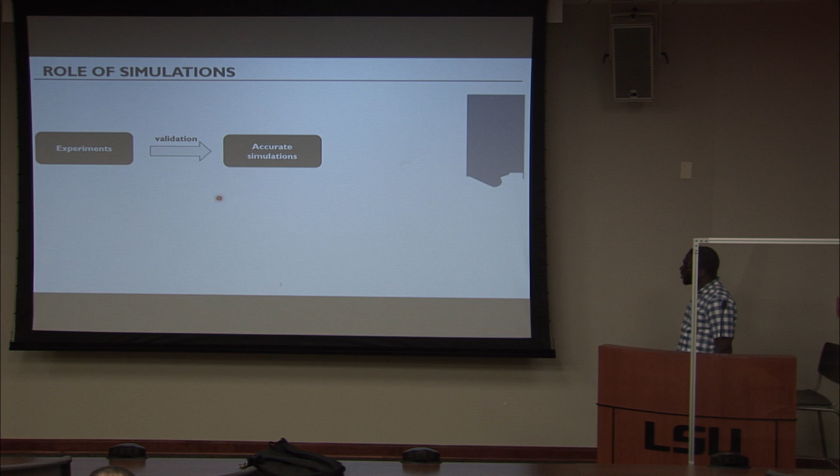So the idea is that we have experiments, and we have developed numerical models that we have validated against experiments.

Basically, what we want from the simulations is two things: we want simulations that are tractable, but we also want simulations that are predictive as well.

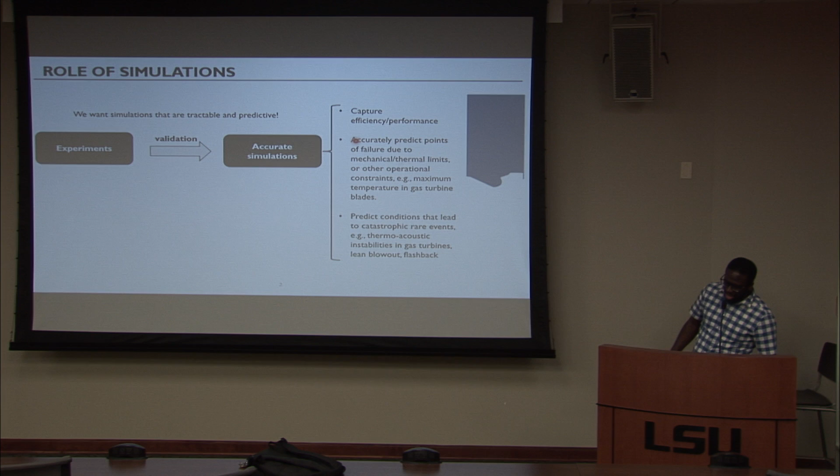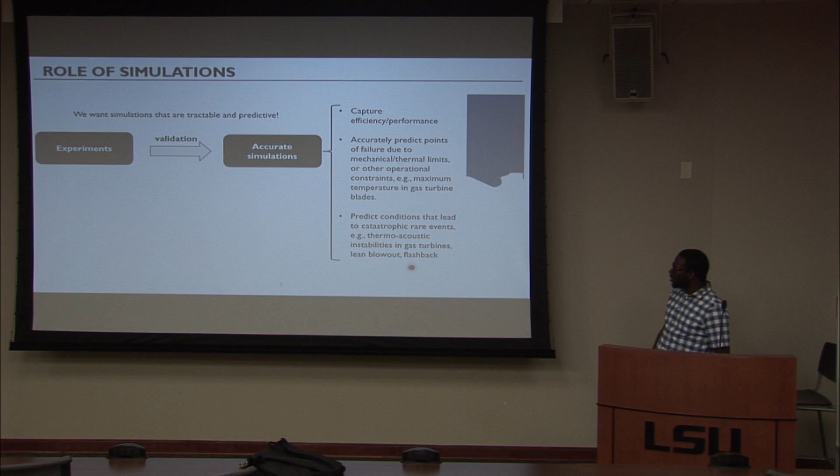What I mean by predictive is that oftentimes we want to capture efficiency or performance. We want to predict points of failure, or sometimes catastrophic events. For instance, I do a lot of work on CFD for energy applications like gas turbines and IC engines. In those systems, we're interested in thermoacoustic instabilities, lean blowout, flashback, knock, and things like that. So we want simulations that can capture all of these phenomena.

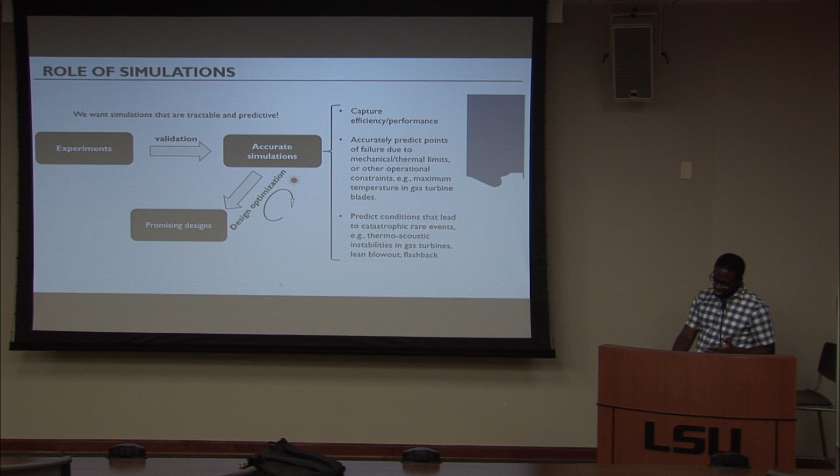Once we get simulations that are accurate and tractable, we can couple the simulation with a design optimizer. The design optimizer is going to run simulations at specific conditions, and progressively guide us to designs that are promising. Once we have that, we can go ahead and do validation by building physical prototypes.

So why do we want simulations? The first reason is because we can easily test our design in regions that are hard to test otherwise. For instance, with thermoacoustic instabilities, you might damage your engine, but if it's a simulation, it's possible to do that safely.

The other huge reason is that we can adjust parameters that are hard to vary in experiments. For instance, if you wanted to change geometry, you'd have to go build a new device, but with simulations you can change the geometry easily.

At the top here, I have a simulation of a heavy-duty diesel engine, and you can see the piston as it goes up. The red spot shows when you inject the fuel into the engine. These are the kind of applications I'm interested in: simulation-driven design optimization, specifically for combustion or energy devices where you burn a fuel to generate energy.

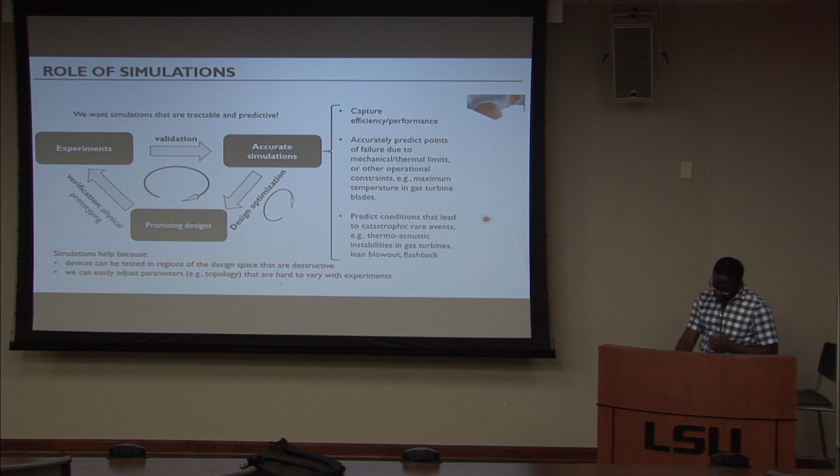I also wanted to talk about the process of design optimization, like in the previous slide. The idea is you have a simulation, you run it at different conditions, and when you get the results, you pass them to an optimizer. The optimizer, in return, gives you a new set of points to run, and you continue the cycle on and on like that.

The goal of the optimizer is to lead you to the lowest or highest point based on your design objective. Your design objective might be to increase the thrust of a jet engine, or to minimize fuel consumption. The optimizer is going to take steps and guide you in the right direction.

In terms of simulations, most of the types I run are called computational fluid dynamics, or CFD. The basic idea is that we're using numerical methods to solve the PDEs that govern the flow of a fluid. So what are some of the challenges we face? The first is that CFD simulations take a very long time to complete, even when using several processors in parallel.

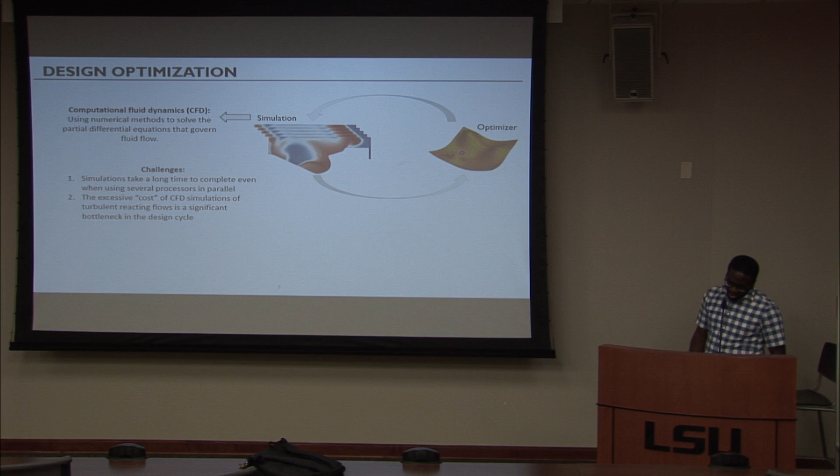Running CFD simulations, if you wanted to fully resolve all the scales, is going to take several months, or even in some cases several years. So it's just impossible to run. What that means is that usually the cost of CFD simulations is a huge bottleneck whenever you're trying to do simulation-driven design optimization.

And so what we have to do really is we have to use simplified models. We make assumptions, we simplify the models so that it can run fast enough. So that's basically what we do.

So what are some of the goals of my research group? We do research in two areas. The first one is to improve the accuracy of these reduced simulations or the simplified models. Or you can think about it as trying to make high fidelity simulations more practical. So we can think of that as working on the left side of that cycle.

But we'll also do some work on the side of optimization, which is how do we create design optimizers that are efficient with the way they use simulations. So what do I mean by that? You might have an optimizer that needs to run 100 simulations to get you a good design. But you could design an optimizer that's more efficient, that only requires 50 instead of 100 to get you a good design. So you can make progress on both sides of the cycle to reduce the overall time for that design cycle. That's the idea.

All right, a bit about the kinds of simulations that I run and why it's so challenging. This is what I like to call multi-physics, multi-scale, multi-species. First, the multi-physics - what does that mean? Well, it means that we have to capture multiple physical phenomena.

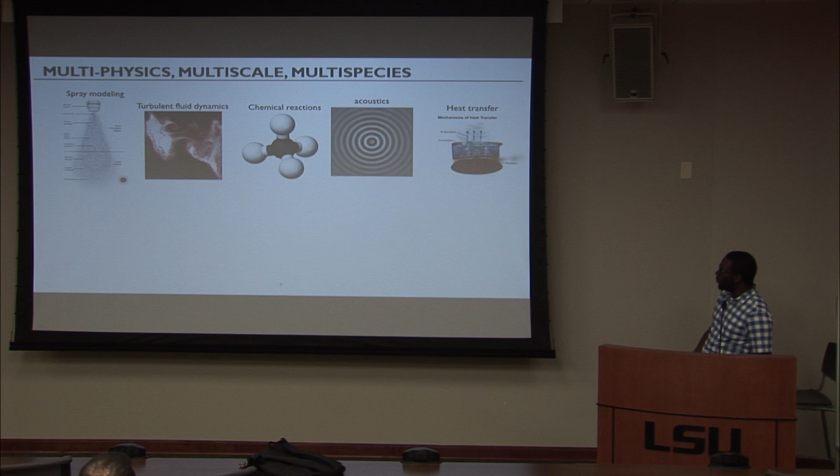You have to have a simulation that captures all of these effects. The problem isn't capturing these effects as much as it's the interactions between them. So you can have your spray that comes in and that can generate turbulence. Or you can have your heat transfer kind of affect the chemical reactions. Or you can have the interactions between chemistry and turbulence, which is a big deal, and it's really tough to capture. So that's the multi-physics part.

It's multi-scale because the range of time scales range from about a nanosecond to the order of seconds. You have to capture what's going on across those scales. You have a large range of scales in space as well. And then the last one is if you have chemical reactions, oftentimes you have several species you have to capture.

So if you have hydrogen and oxygen, we know that that should give us water. But you don't just get water from hydrogen and oxygen. You have several steps and minor species that get formed in the process, and you have to capture what's going on with all of them.

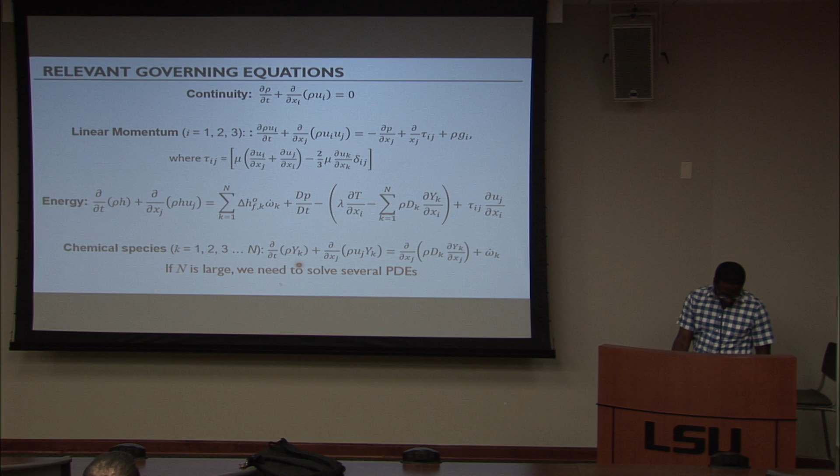All right, so I'll go a bit into the two sides of that coin that I mentioned. But before that, let me put things in context. The first part of the talk focuses on the left-hand side, and the second part focuses on what I have on the right, which is optimizers. I'm going to talk about some of the work we're doing in my group on trying to make these two sides more efficient.

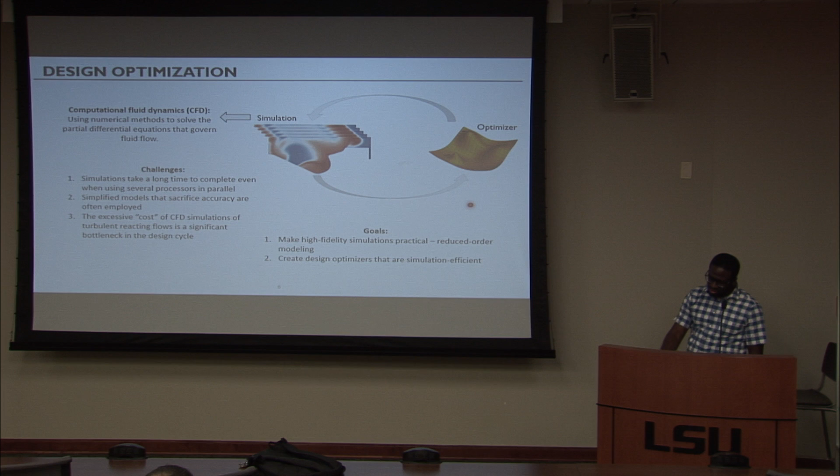So the first part, I'm going to talk about specialized neural networks for reduced order modeling of turbulent combustion. And I'd like to acknowledge my collaborators. This work was done while I was at Argonne as a postdoc before I joined LSU. I'd like to acknowledge Pinaki Pal, research scientist, Cody Nuno, who has now left, and Prithwish Kundu, who worked with me on this project.

So the basic idea of a neural network is I have an input, which I'm calling x here, an input vector. I'm trying to make a prediction for an output vector y. This is a supervised learning process. I have some hidden layers, weights w, and a bias vector, set of biases, b. The idea is that for each layer I apply a linear transformation and a nonlinear activation function, from the input layer all the way to the output layer. I have a loss function that measures the distance from my predicted value to my actual value that I'm trying to find.

I can use some sort of gradient descent algorithm to update the weights so that the predicted and actual values match. So that's the basic idea: it's a supervised learning process. I give my network examples, it learns from that, and in the future I try to use what it's learned to make future predictions.

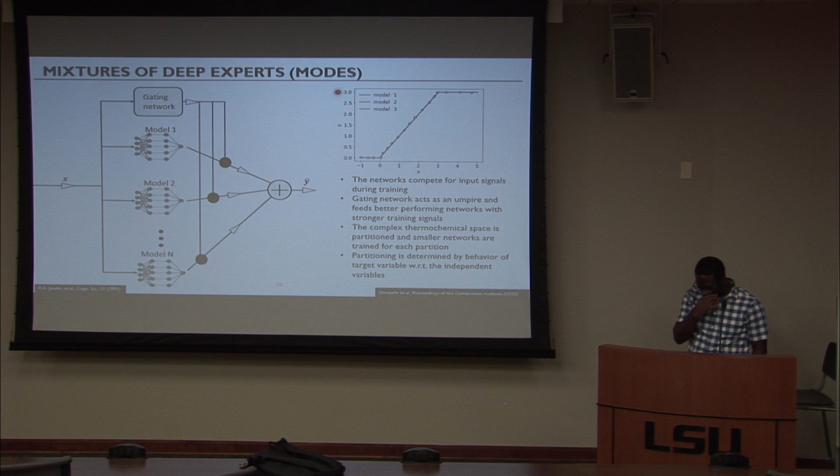So the loss function that we have is shown here, and this is a loss function for a given expert k within a system of n experts. E sub k is the error—the predicted minus the actual value you're trying to predict for that expert. Pk is the prior probability that an expert is the best, which is the probability the gate network gives us.

Beta is a parameter that tries to keep the experts separated even as the errors go down. The motivation behind this loss function is that if we differentiate it, the learning rate for updating the weights gets scaled by alpha sub k.

If e sub k is small relative to the rest of the experts, then alpha sub k is large, meaning that expert learns faster. The reverse is true: if e sub k is large, alpha sub k is small, and that slows down learning for that expert. So that's how they train.

In terms of the loss we use for the gate network itself, it's just the standard cross-entropy loss of classifiers.

So now comes the application. That's the idea behind mixture of experts itself. For the application, what we've chosen here is something called the Flamelet model, which is widely used in combustion modeling, turbulent combustion modeling.

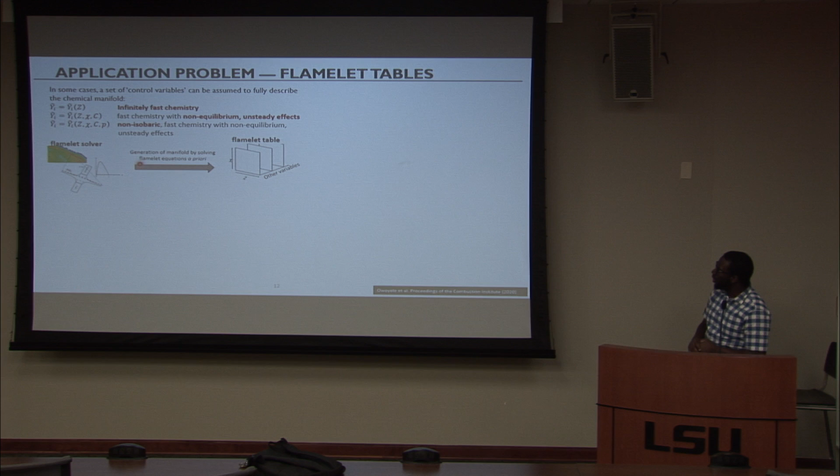The way this is solved is you run a very simple case, then take the result and store it in a table. So it's a tabulated model, and we try to store that table in memory so that when we run the CFD, we don't have to solve the chemical species in real time. All we have to do is look up the table, interpolate, and pick out the result. That saves a lot of time.

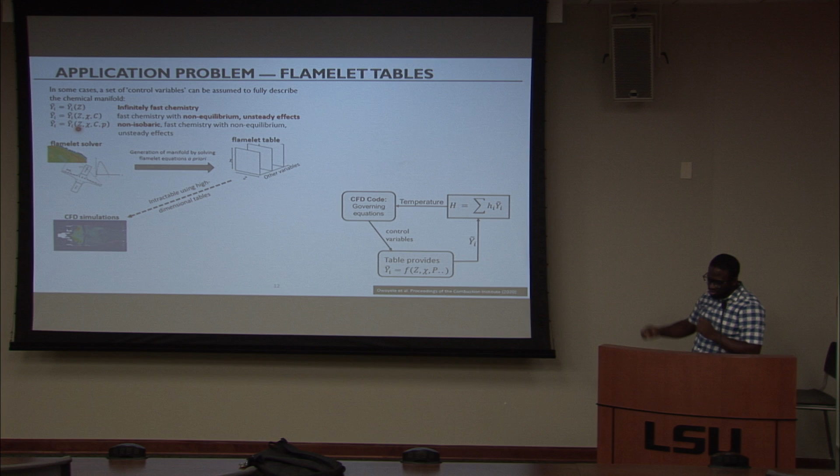The problem is that storing a table is intractable if this vector is high dimensional. So with one or two variables it's fine to make a table, but as you increase the number of control variables or dimensions, it becomes intractable because of the memory demands. As you go from one to six dimensions, the size of your table basically increases exponentially.

So the idea is to apply mixture of experts here—instead of taking the table and storing it in memory to predict the mass fractions, we're going to learn that table using a neural network, using a mixture of deep experts, so that we can make predictions in CFD as opposed to relying on the tabulation approach. That's the application here.

The good thing is that for the neural network, we only need to store the model parameters. We don't have to store anything else.

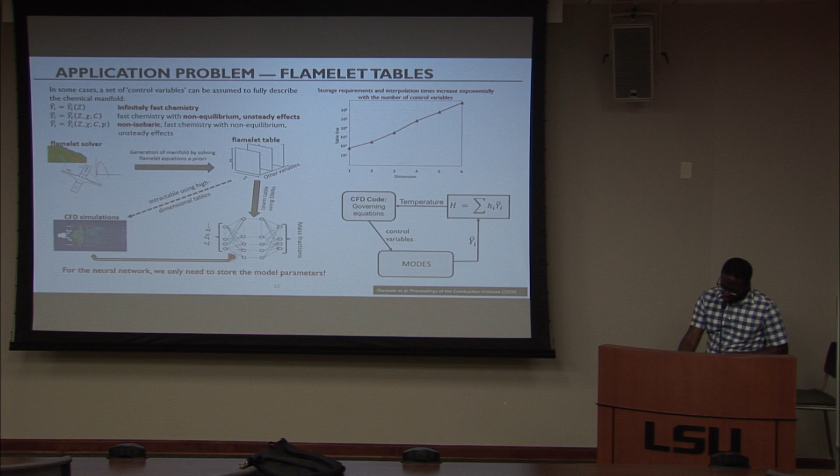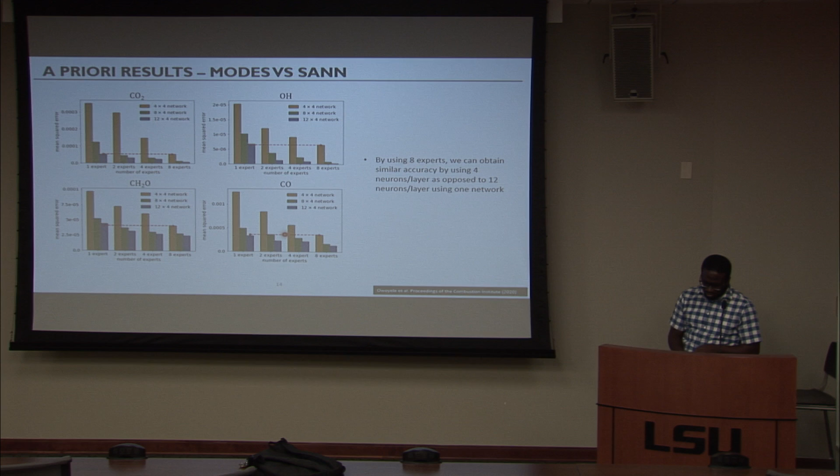We also did something else. The last result I showed was for a 4D table with 4 variables. Here we tried to extend it to 5 control variables. The table had 50 million entries, or 29 gigabytes, which might begin to introduce storage issues in CFD. In contrast, the neural network was about 1 megabyte, and again we see that using the specialized neural networks works a lot better than trying to fit everything with one.

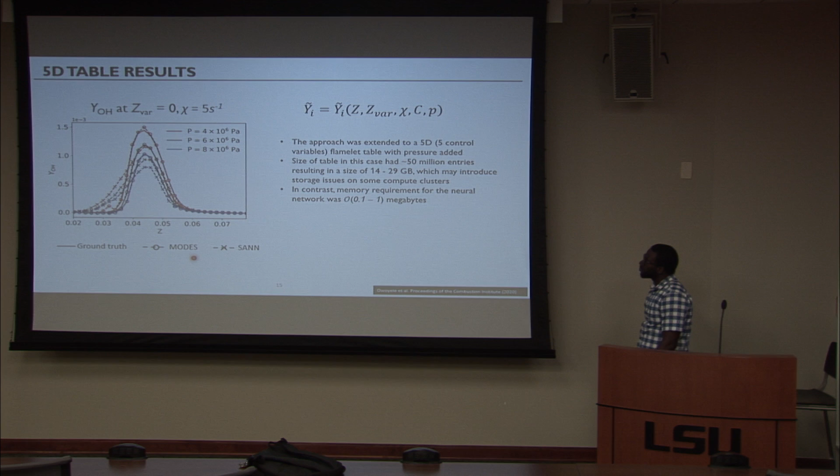We did an actual 3D CFD simulation. These are the details of the setup, called a spray A simulation, relevant to diesel engine conditions. You have a spray that comes through a nozzle, spray breakup, the fuel atomizes and evaporates, and mixing between the fuel droplets and the air.

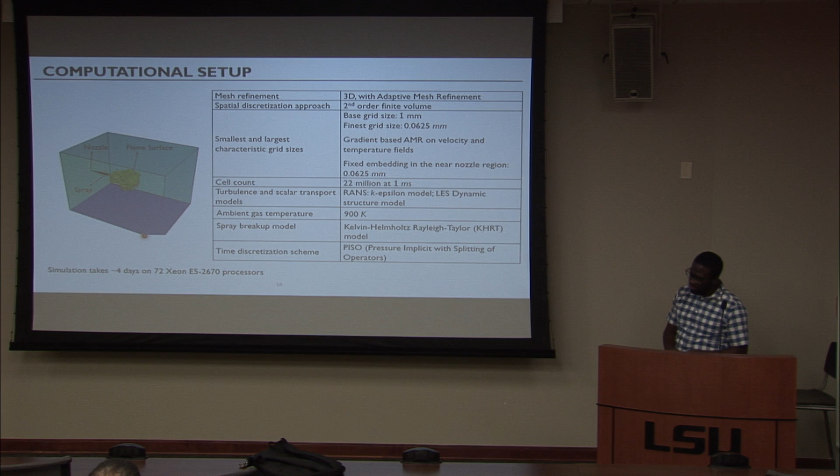Ultimately you have a flame that develops due to that. These are the details of the cell counts, 22 million at 1 millisecond. We use the RANS model, and we also did some LES, which is what I'm going to show. The temperature of the gas around was about 900 Kelvin, and the simulation took about 4 days using 72 processors.

In this result, there's a blue line forming due to the spray. You can see the temperature on the right and OH on the left. OH really comes up when the temperature goes high, because it's related to high temperature chemistry. Let me run that again — you can see mixing occurring, and at some point the temperature begins to rise. The temperature, OH radicals, and everything here is predicted by the neural networks.

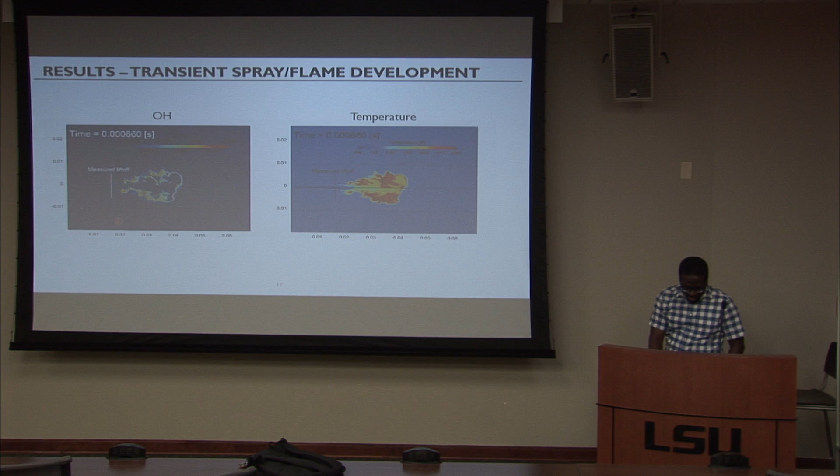We also have results here for ignition delay, which is the time that elapses between when you inject the fuel and when the flame develops. You can see that the MODES approach is really close to experiments — there's a slight error, but it's not too high. I also have a plot of maximum temperature, which it predicts well, and at the bottom, the rate of heat release, which is also well predicted.

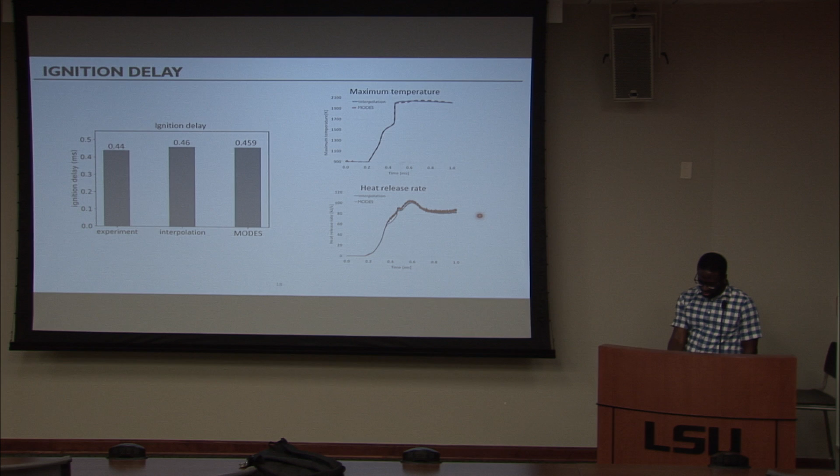The last thing I wanted to mention is that the approach does partition your input space, and it turns out the partitions it gets are actually physically intuitive. We ran a test with some data points: on the y-axis, the progress variable, and on the x-axis, something called scalar dissipation rate. Based on these two quantities, someone working in the field can tell what should be the pre-ignition zones at the bottom.

So you have a reacting fluid, but the reaction hasn't occurred yet. Then what you'd have is what occurs when it's actually ignited, in the process of igniting, and at the top is what happens when ignition has already occurred, so your combustion product.

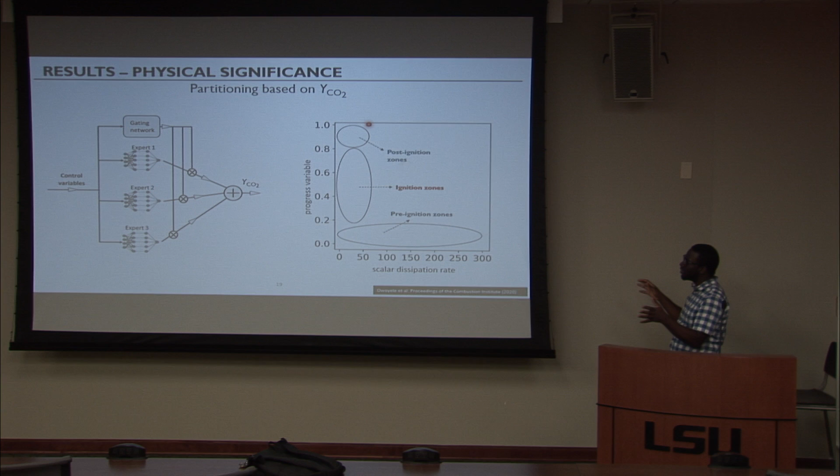We decided to run this problem and see what kind of partition we'd get, and whether the space division is actually intuitive physically. This is what we get: the model divides the space in a way that makes sense physically. The pre-ignition zones are assigned to expert 3, ignition zones to expert 2, and post-ignition zones to expert 1. This was interesting — it's not random, but makes physical sense. If I hadn't known anything about this problem, this would have been a way to understand better what's going on.

All right, so to summarize the first part of my talk, I presented a mixture of experts approach for developing specialized neural networks. I would say that even though this was applied to turbulent combustion problems, this is something that can be applied to a range of problems, as long as the function you're trying to approximate is complex enough.

We show that it led to better representations and accuracy compared to using a single neural network. And we also show that the global characteristics, like the ignition delay, was well predicted. And then in the last slide, I show that the partitions that we get are actually physically intuitive.

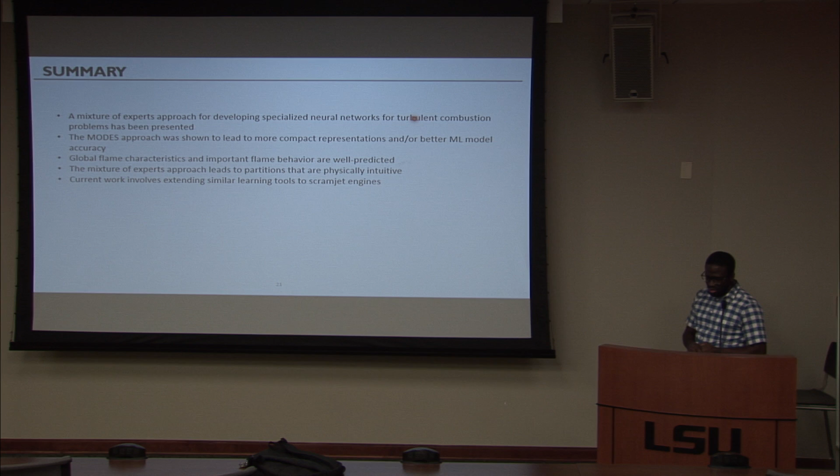And right now, we're trying to extend this to scramjet engines to see how this performs for those kind of applications. Lastly, I want to acknowledge the resources that we use and funding from DOE's office when I was in Argonne. We used clusters called Blues and Bebop at Argonne National Lab.

All right, so that's the first part of the talk. The second part, I'd like to talk about the second side. So we want to get simulations that are practical and fast, but we also need to get optimizers that are more efficient in finding out the best design that can take those simulations and use them to figure out the best design that we can get.

So for this work, I would like to acknowledge my student, my PhD student, who is right here, who has done a lot of good work and worked hard on this project. And a lot of what I'm going to be showing today is really his work and what he's done. And so I'd like to acknowledge him for that.

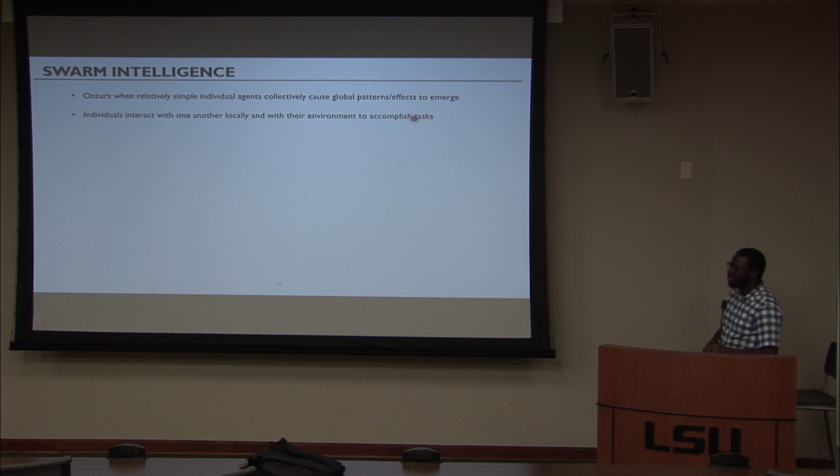So I'd like to first start by talking about the idea of swarm intelligence, because it really fits into what we're trying to do here. So the idea behind swarm intelligence is that it occurs when you have an individual agent that's simple all by itself, but it can work with other agents to cause global effects to emerge. The idea is that it interacts with its environment and with other agents to accomplish tasks that by itself is impossible to accomplish.

So think about a single insect, for instance, like an ant, right? It can't really do much, right? It can maybe lift a few things, but what happens is that when they work together, they're able to accomplish complex tasks. And that's the big picture of swarm intelligence.

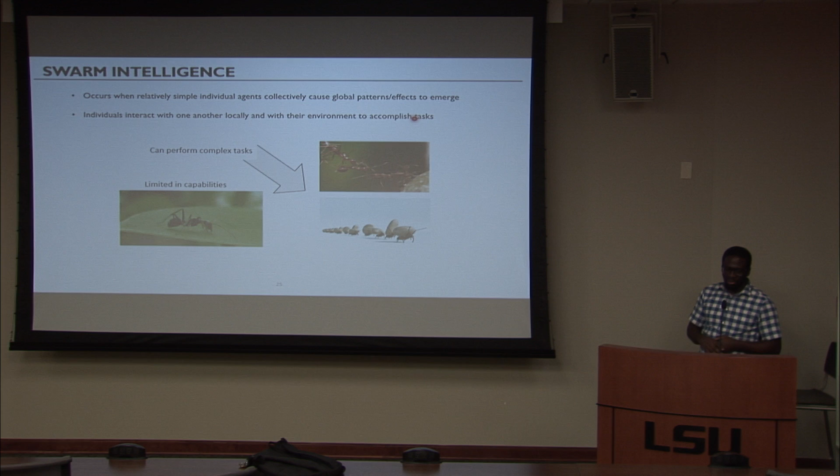So, well, we can sort of think about other examples. So first, I mentioned ants, right? So we know that ants usually, when they're trying to forage and look for food, they'll actually work together and collectively choose the shortest path together. We have wasps and termites that build nests and mounds. So this is an example of a mound. And they can get pretty tall, several feet tall actually. It's impossible for one of them to do this by itself, but they can work together and do this collectively.

We have flocking in birds and fish, and also bees as well. When they're looking for a new home, they would often scout and look around and try and select the best location that they can find.

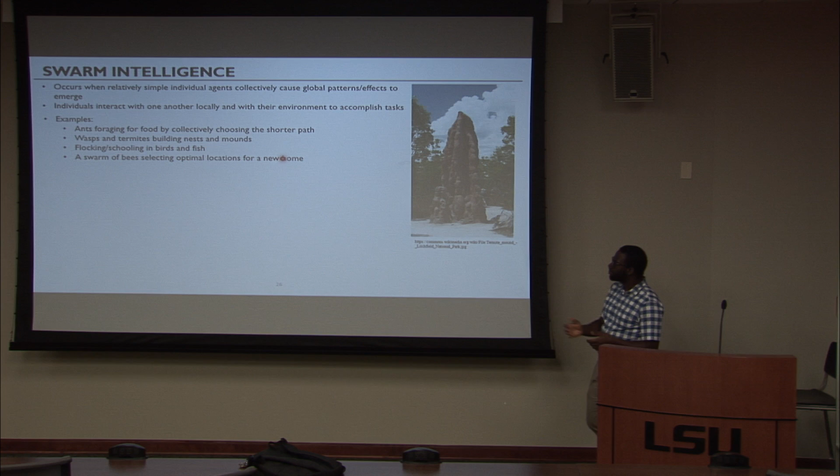So what does all of this have to do with what we're talking about, optimization? The idea is that we can do something similar. We can have this swarm of agents that cooperatively work together and try to find the maximum point or the minimum point on a surface, right?

So in this case, I have a function. You can sort of think of this function as having a variable x and y, or x1 and x2, and the height is the objective we're trying to achieve. So we're trying to maximize the height on that, right? And so the question is, how can we put a swarm or some agents on that surface and work together to find the maximum point?

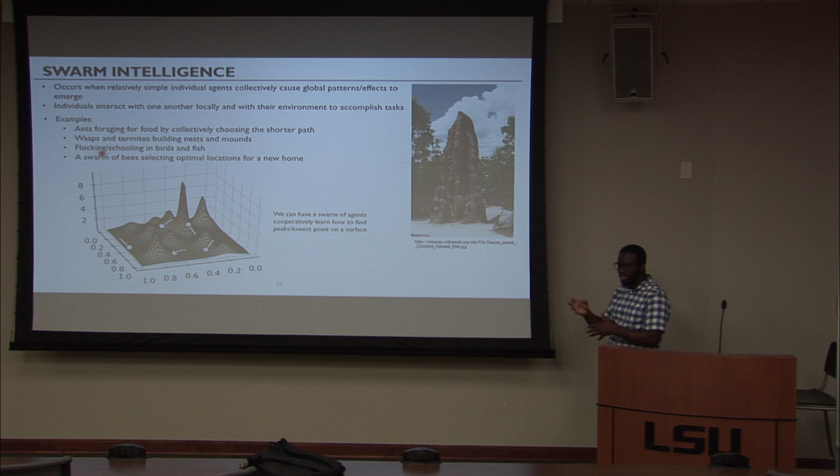So in line with that, I would like to introduce what we call DeepHive. And it's an approach that we've developed in my research group. And the goal of DeepHive really is to develop optimization policies using reinforcement learning.

The idea behind reinforcement learning is that you have an agent that's within an environment. The agent can take actions within that environment, and whenever it takes an action, two things happen. First is it gets an updated state. So the initial state was state s sub t at time t, but now the new state is s sub t plus 1. So it gets an updated state, but it also gets a reward for the quality of the action that it took. So the idea is that if it takes an action that's good, then it's going to get a good reward. But if it takes an action that's not good, we're going to punish it.

And so you can sort of think of the first part of my talk as focusing on learning by examples.

In reinforcement learning, we try to learn from experience. If you think about it, that's how we learn, right? The first time you taste a candy as a kid, it tastes sweet, and so you want to try it again because you get a positive reward. If you touch a live wire, you're going to get electrocuted, and you'll know not to do that again. So that's sort of the idea.

So the idea is, in summary, you try to learn to perform the best actions within an environment by trying to maximize reward. So that's what we're trying to do here. The goal of DeepHive, like I said, we're trying to discover optimization policies.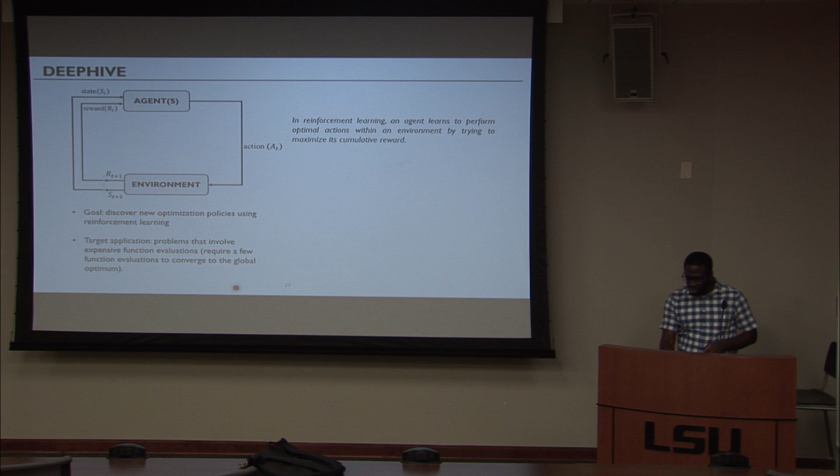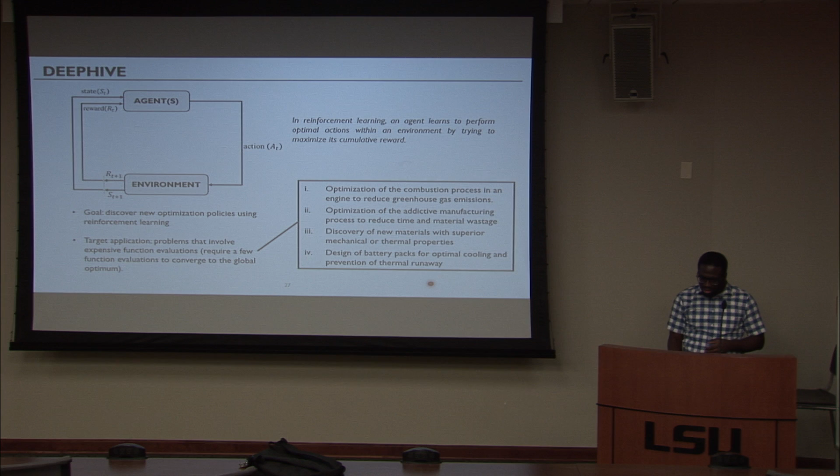The kind of applications that we're interested in really is the applications where the function evaluation is expensive. What do I mean by that? Think of trying to optimize combustion process to reduce emissions, or trying to discover new materials, or trying to design a battery power pack to optimize cooling. In all of these cases, anytime you have to go and take a step and do an experiment or run a simulation, it takes a long time.

So that's what I mean by it's expensive. Expensive might mean that it takes a while to do it. It might mean that the simulation takes a long time. It might mean that it costs a lot of money. The idea is that we don't want to run a lot of these simulations. We don't want to have to evaluate the model a lot of times. That's the idea.

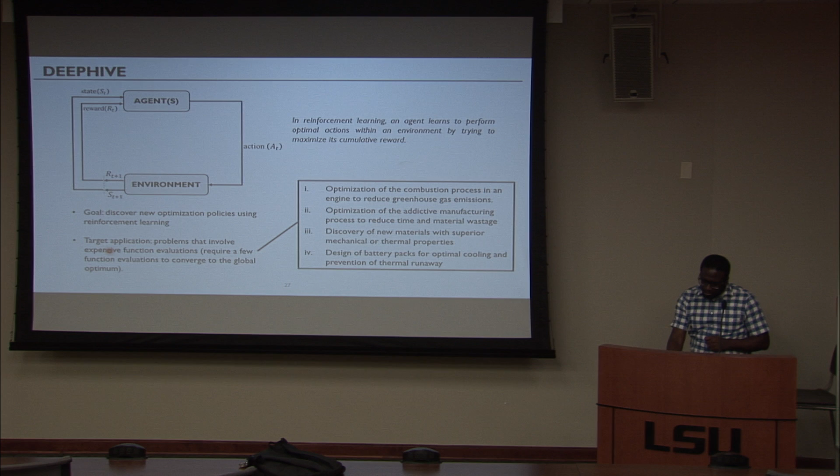So on this slide, I'll talk a bit about the connection between elements of reinforcement learning and DeepHive. At the top, I'm going to have key elements of reinforcement learning, and at the bottom, I'll have how those relate to what DeepHive is trying to do. First, in reinforcement learning, a key element is the environment. In this case, the environment is simply the function that we have that we're trying to optimize. That's the environment. That is where the agent lives and where it can take actions.

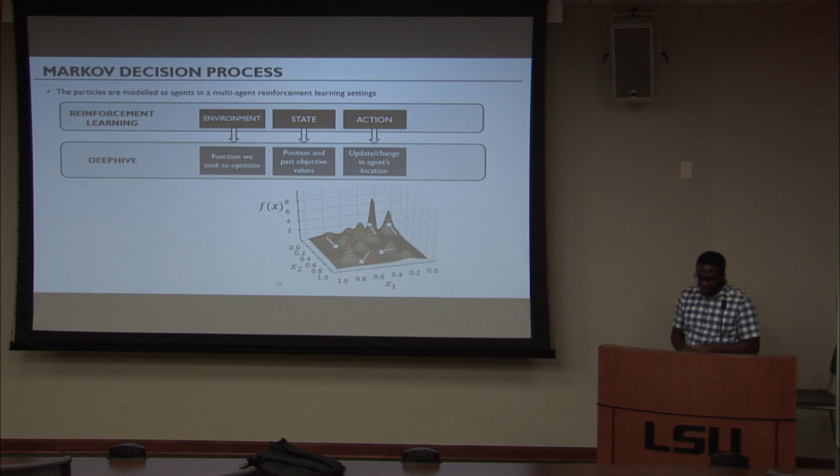The state is simply the position and past objective values of all of these agents, right? I have the agents sort of in the white circles, and that's the current state of the system. I can take actions within that environment, and to take an action simply means — you can sort of see the red arrows there. It means that I can update the position or location of these agents.

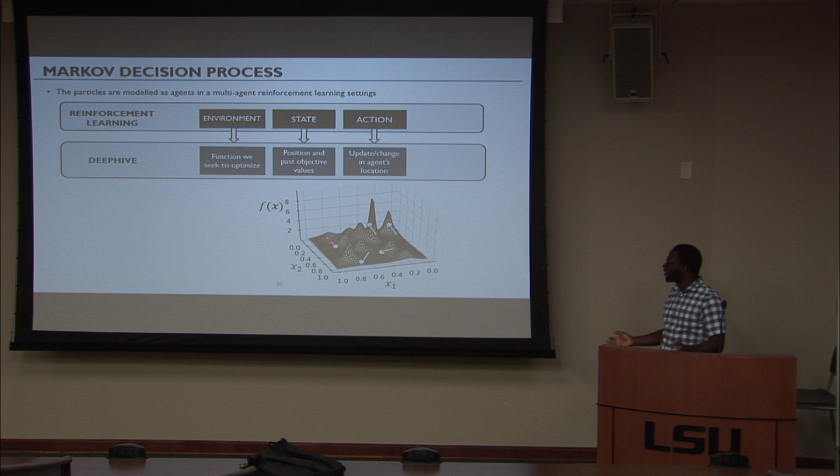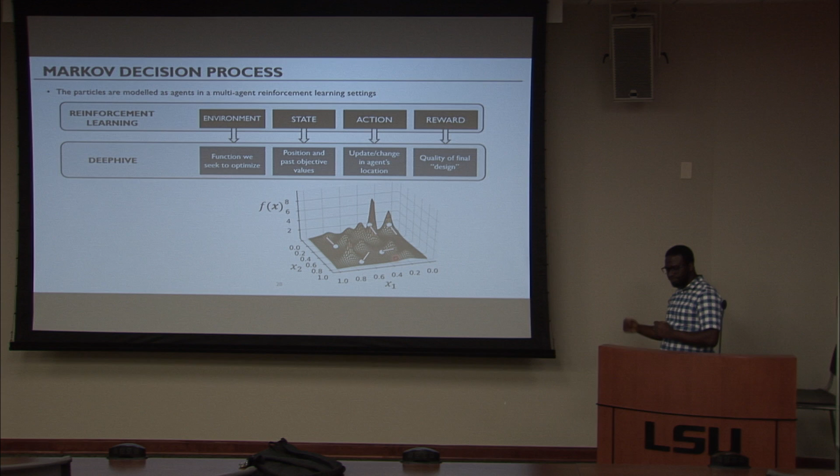So I've taken an action, and whenever I take an action, I'll see how good it is. Did I get a better objective, or did I get a worse objective? And so we are going to reward these agents, based on the quality of the design that it finds. A policy that doesn't find a good location is going to be penalized, and a policy that finds a good location is going to be encouraged in the future. So that's the idea: encourage good actions, discourage bad actions. We want to decrease the probability of taking bad actions.

So we have two stages here. The first one is we're going to take a bunch of agents that know nothing, and we're going to try and train them to learn how to optimize. That is called the policy generation phase. What we're going to do first is select an optimization problem, some sort of function, and we're going to set up the reinforcement learning environment — set up the state, actions, rewards, all that stuff. And then we train the agents using something called a PPO algorithm, which I'm going to talk about in a bit. Once we're done training, we're going to get something called a policy.

It's a strategy for updating the location of the agents. And what we want to do is save the best policy that we can find.

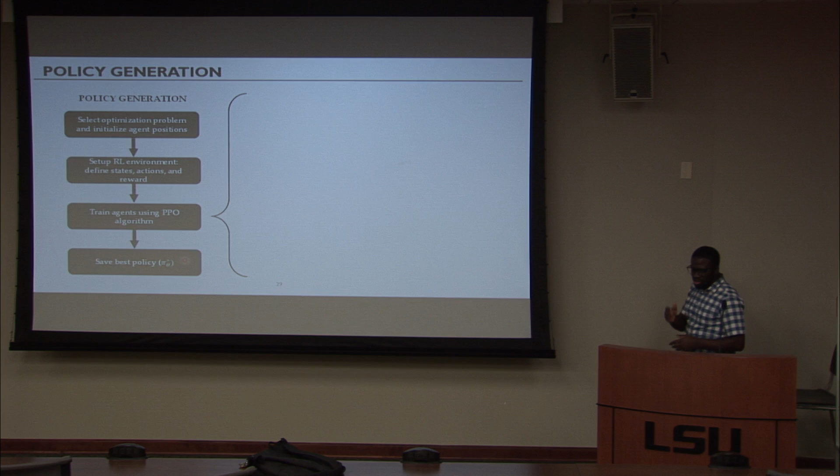If A sub t is negative, that means that action is going to be discouraged in the future. If it's positive, it's going to be encouraged.

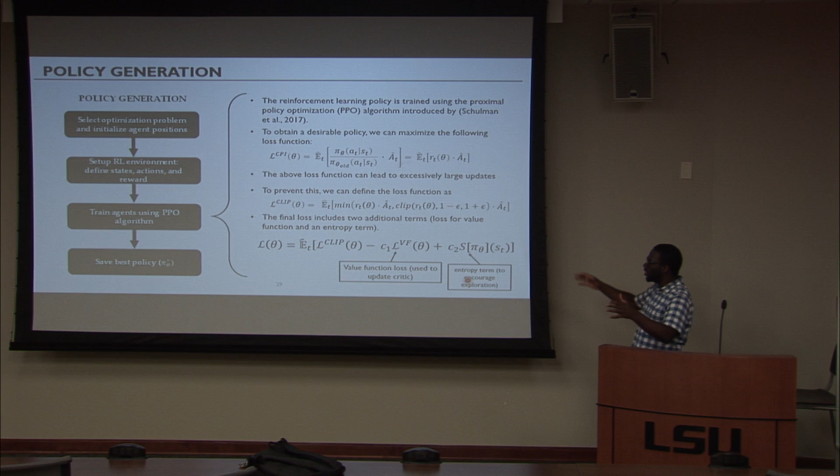All right, so the left part I've spoken about, we do the policy generation. Once we're done with that, it's time to deploy the policy and actually test it. So we have a policy, pi theta, which is actually just a neural network. The neural network takes in the states, and it gives you an action that you should take in that space.

So that's what we do. We initialize the agents, generate actions from the policy, the best policy that we saved, and then update the agents within that surface and have them talk to one another and move around. We repeat that process until it converges.

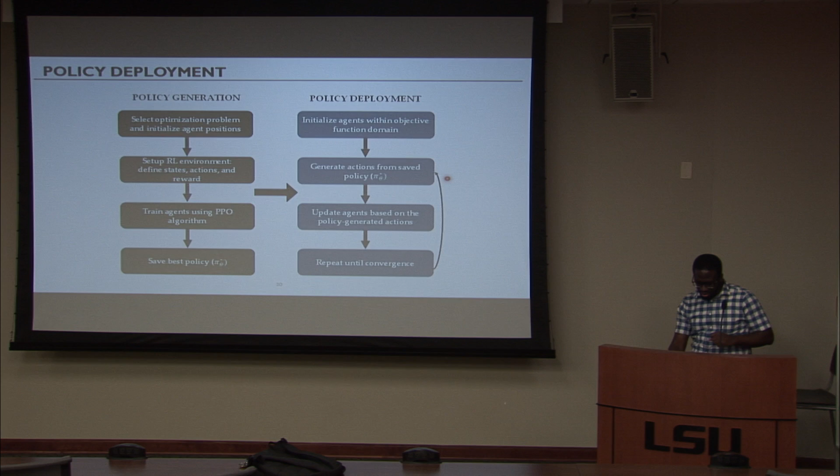All right, so we compared what we got from DeepHive with some few other optimizers out there. We have particle swarm optimization, which is PSO. It's also a swarm intelligence-based optimizer, but it's something that's manually designed, not learned automatically like we're doing here. We also have ones called GENOUD and DE as well. These two are genetic type algorithms.

The neural network we used to predict the policy has 2 hidden layers with 32 nodes in each. The input layer had about 4 neurons. Training took about 2 hours on a workstation, so it doesn't take that long.

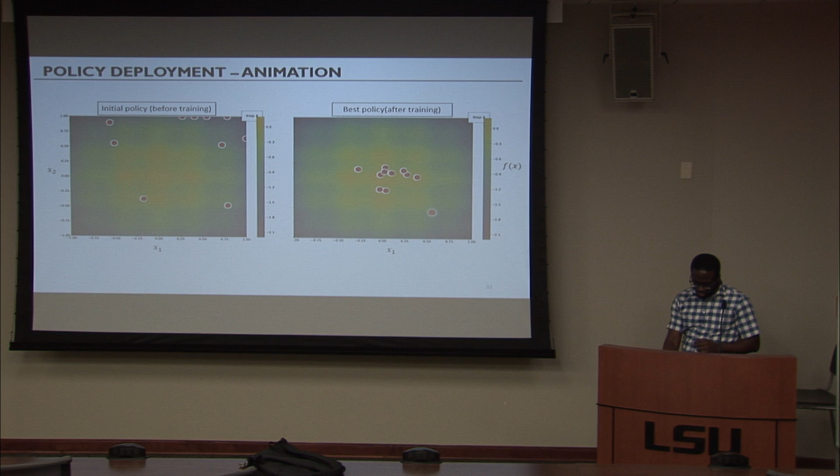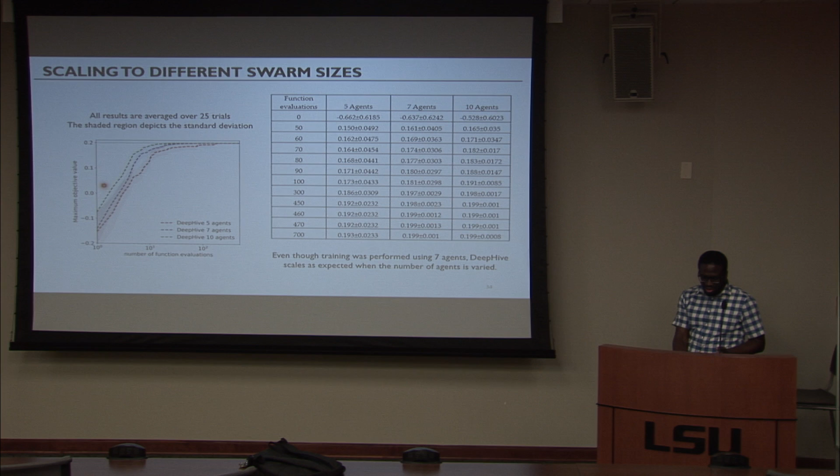As expected, 5 doesn't perform very well, but it still finds the optimum point at 0.2. 7 performs better, and 10 even performs better than that. So you can train with 7 and use 10 when you're deploying it, and it works just fine.

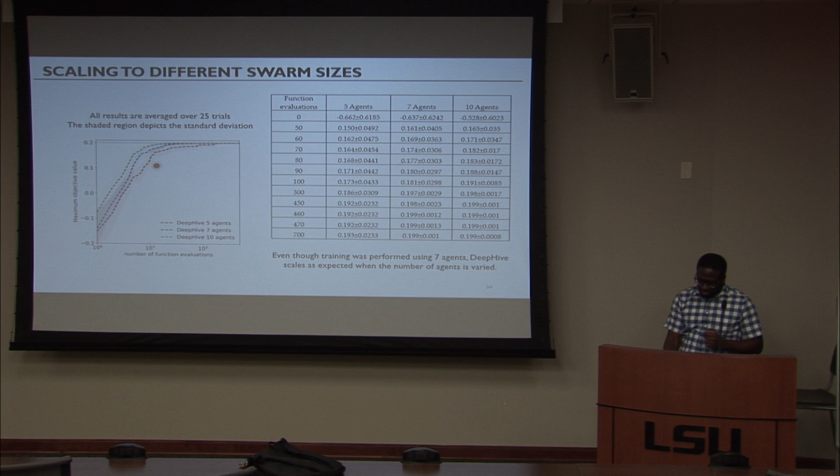What happens if we try to increase the number of dimensions? Remember that the Cosine Mixture function has a parameter called d. If you increase the value of d, you can have a 1-dimensional version or a 3D version of the function I just showed you. The only problem is that as you do that, the number of local maximum increases. Think of the local maximum points as potential traps where your optimizer can get stuck in.

We were wondering, well, it's working well, but everything I've shown so far is we trained it on the Cosine Mixture function, and we're testing it on the Cosine Mixture function as well. Even though we varied the number of dimensions and the number of agents, it's still the same function. So we're curious to see what's going to happen if we give it a totally different function. The reason is because there's a risk that the agents are memorizing the location of the global optimum, and they just always go to the middle, regardless of what happens.

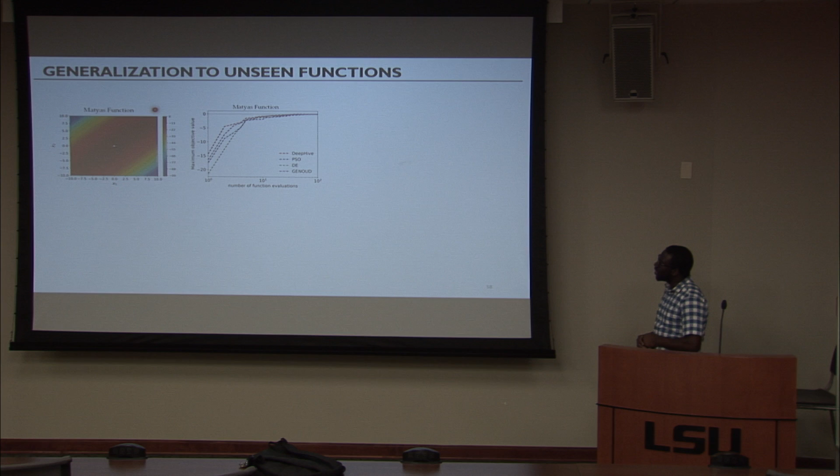So these are some of the results we get from there. The one on the top left is called the Matyas function. You can see that it's not a lot better, but it's somewhat comparable to the rest of the optimizers. So it's definitely learning a policy for optimization.

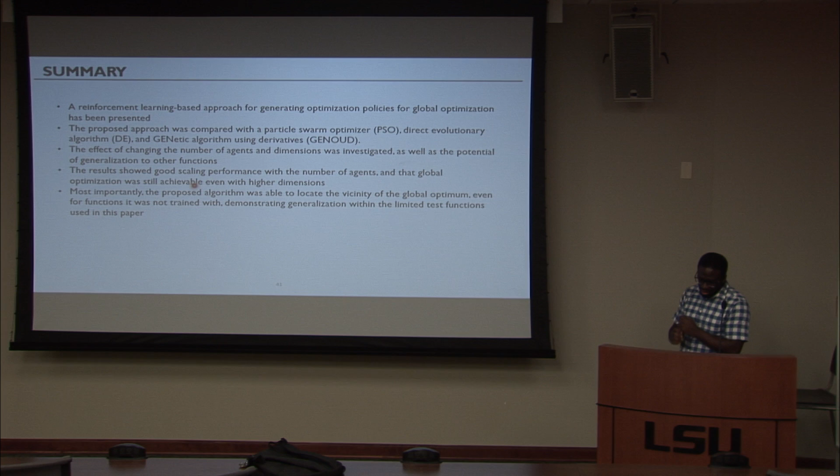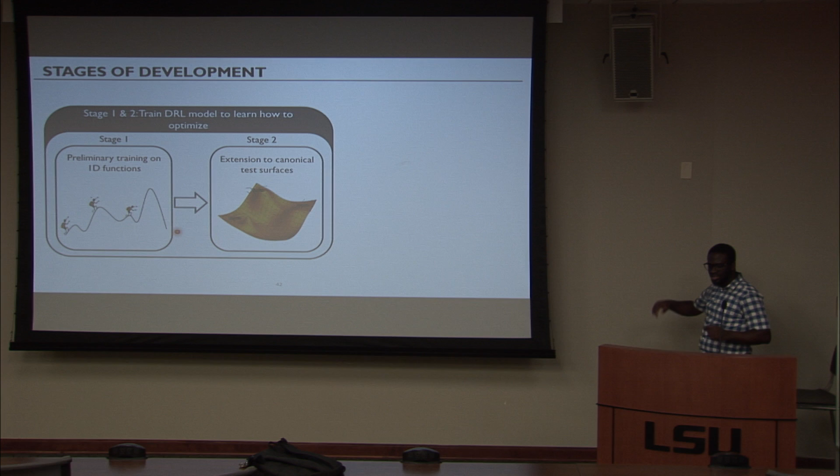What we're working on right now, we've done these two stages, testing it on a 1D function and extending it to 2D type surfaces. What we're working on now is trying to extend this to actual CFD optimization studies to see how that performs. We're also thinking of introducing things like a local search component to make it a lot more efficient.

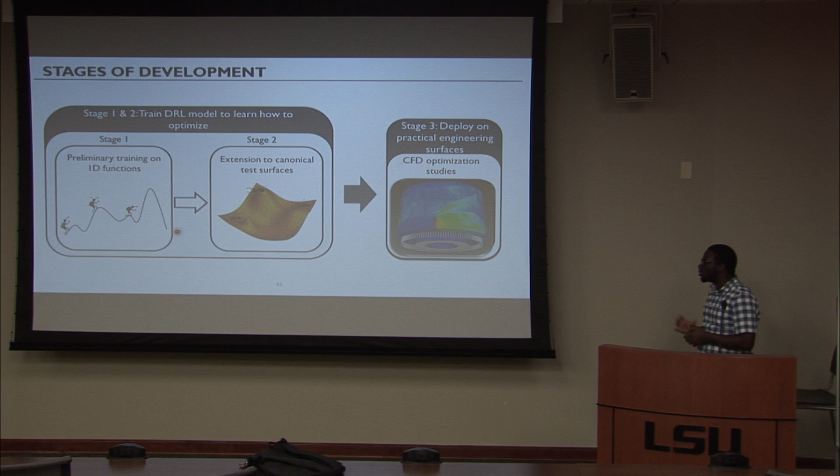All right, that's the end of my talk. Thank you for listening, I'll be happy to take any questions.

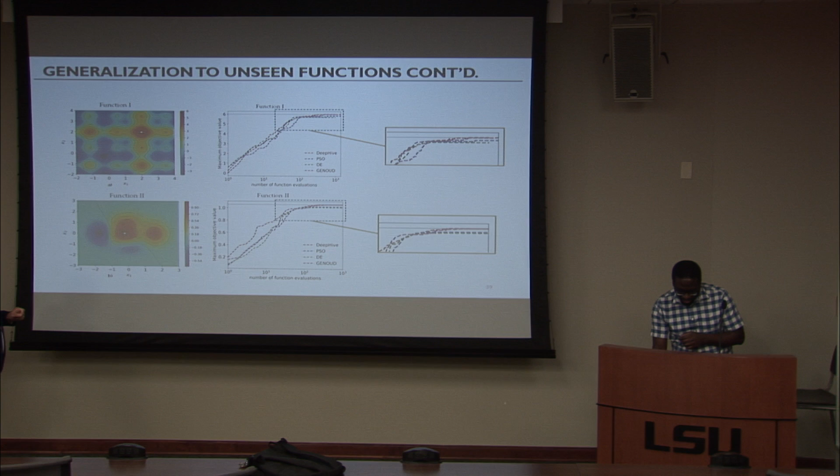So I have one last question. In this picture you showed, the maxima were quite a distance apart. What happens if you put them close together? Can they still find it? Oh, you mean when you initialize them? No, can you go back to the image? I think here the distance is quite large, but what happens if we move them so they're really close?

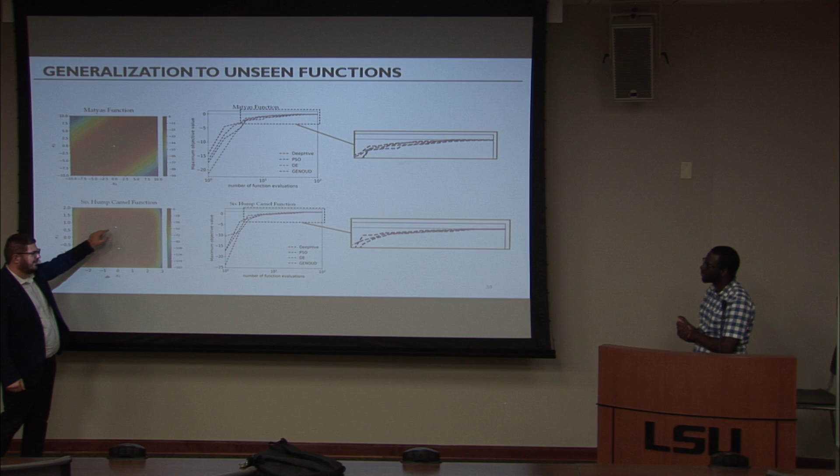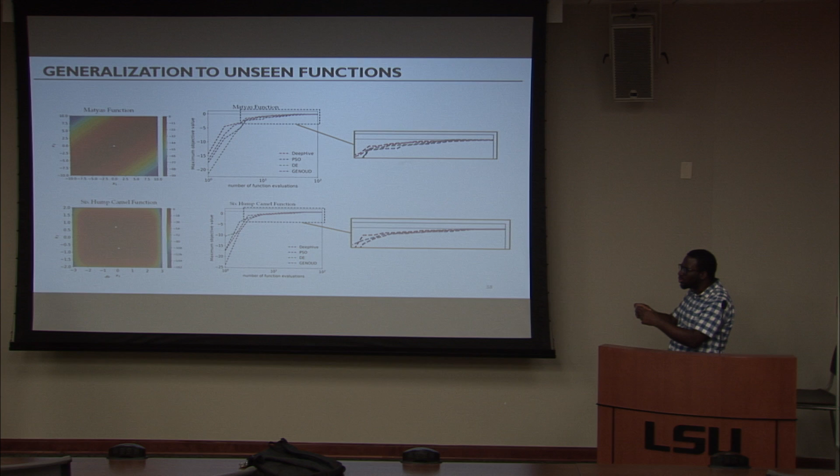Oh I see, because this makes a challenge if they're really close, since you could hop between them probably. I don't see why it wouldn't do that, I think it should be fine just based on the way it works. It's probably even easier to find when they're close together, because again, it doesn't know there's a different one somewhere else, it's just a local function. Just curious what happens if they're close together. Yeah, we haven't tried it, we haven't had a function like that, but I assume it should still work well.

That would be interesting. Okay, do we have any questions in Zoom? I see something on the chat. Okay, it's just from Christopher.